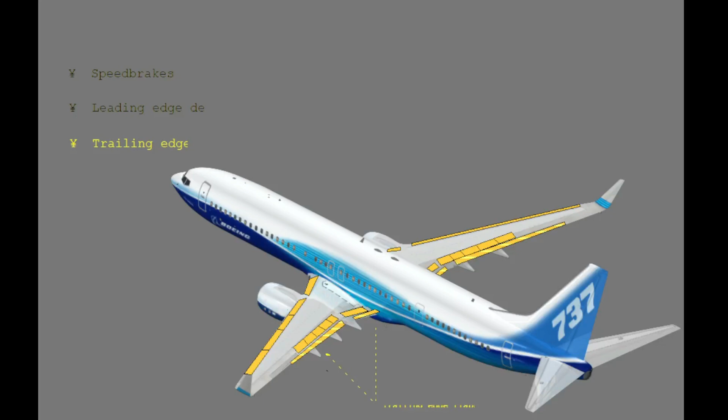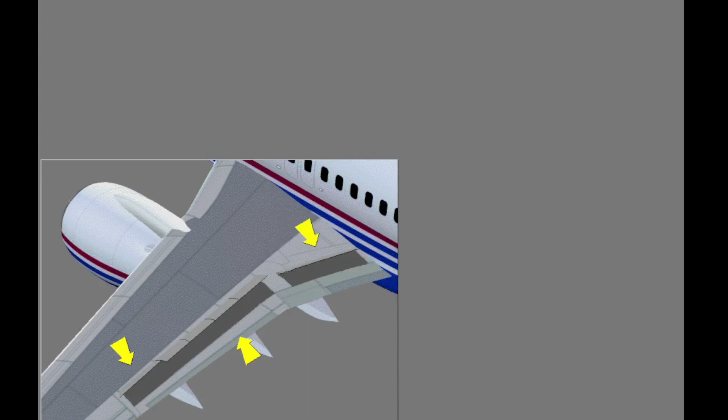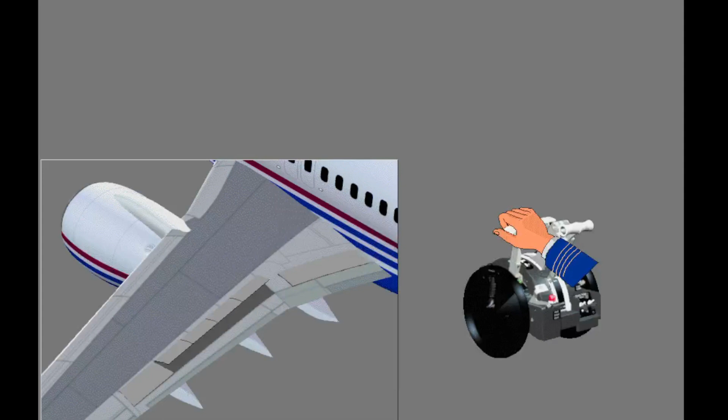Each wing has 4 flight spoilers and 2 ground spoilers. The flight spoilers are operated manually in flight to slow the airplane or increase the rate of descent, or automatically to help the ailerons in roll control.

You must be careful when you operate the flight spoilers manually and the airplane is turned. The airplane roll rate can quickly increase. The ground spoilers operate with the flight spoilers on the ground. The flight spoilers use hydraulic systems A and B. The ground spoilers use hydraulic system A.

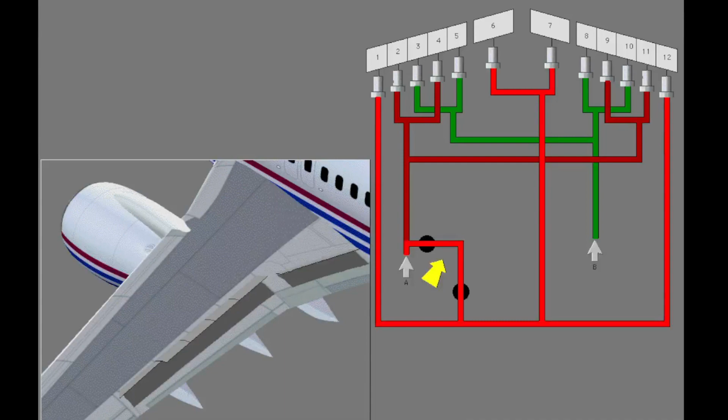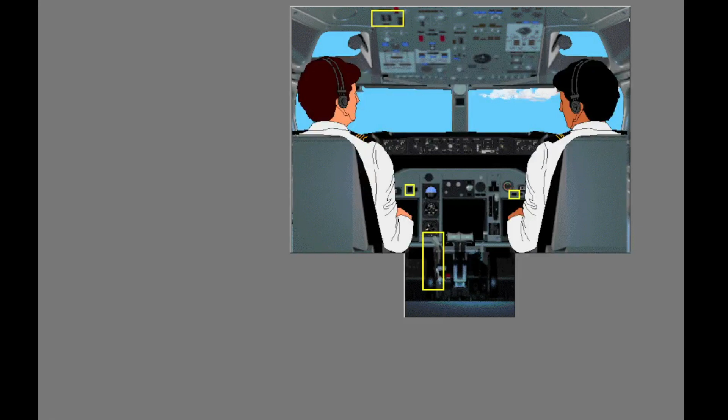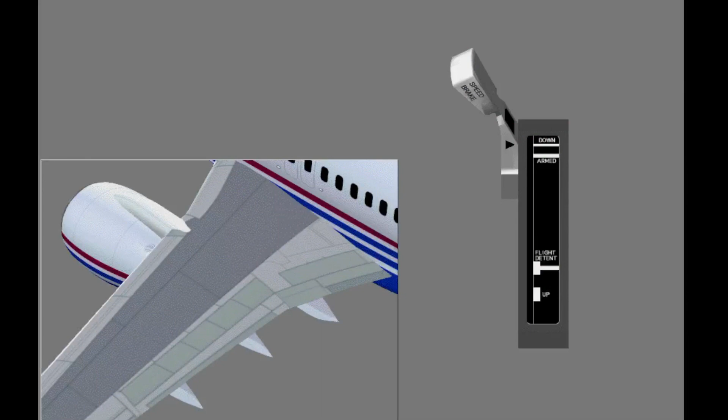The controls and indicators for the spoiler speed brakes are found here. The speed brake lever is on the captain's side of the control stand. In the down detent position, all flight and ground spoiler panels are down. The armed position is for automatic operation.

In the flight detent position, all flight spoilers extend to the maximum position. In the up position, all flight and ground spoilers extend to their maximum position. The up position is used only on the ground.

The speed brake armed light is on the captain's instrument panel and shows that the speed brake system is armed for automatic inputs.

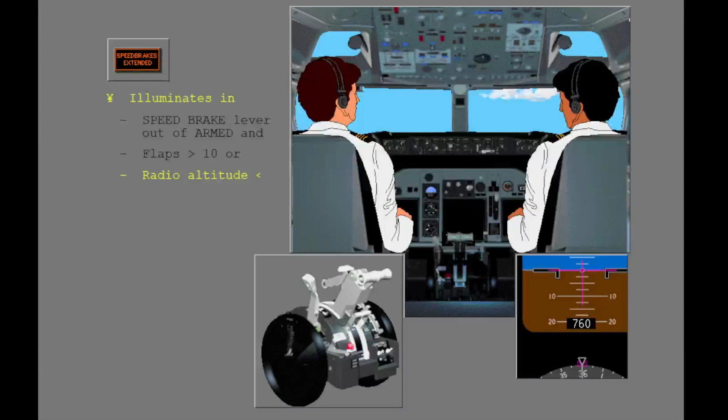The speed brake extended light on the first officer's instrument panel illuminates in flight when the speed brake lever is out of the armed position and the trailing edge flaps are extended to more than flaps 10, or radio altitude is less than 800 feet.

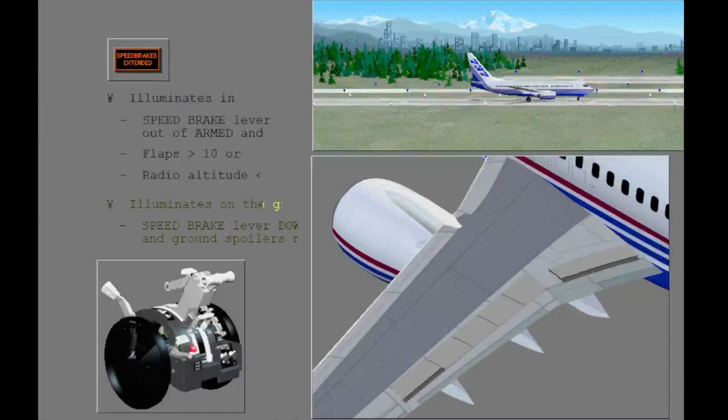The speed brake extended light illuminates on the ground when the speed brake lever is in the down detent position and the ground spoilers are not stowed. The spoilers are set to operate automatically on landing or during a rejected takeoff.

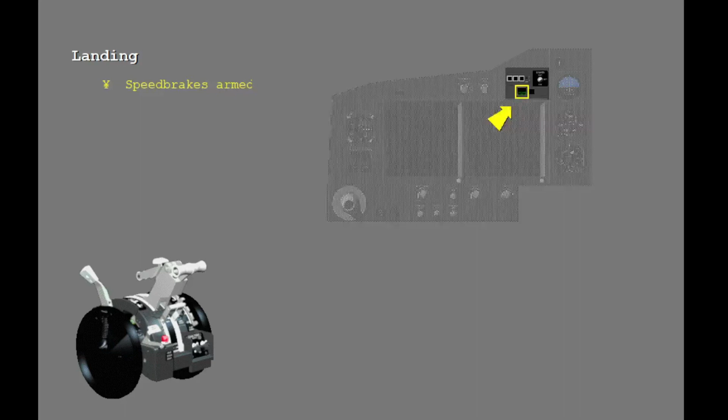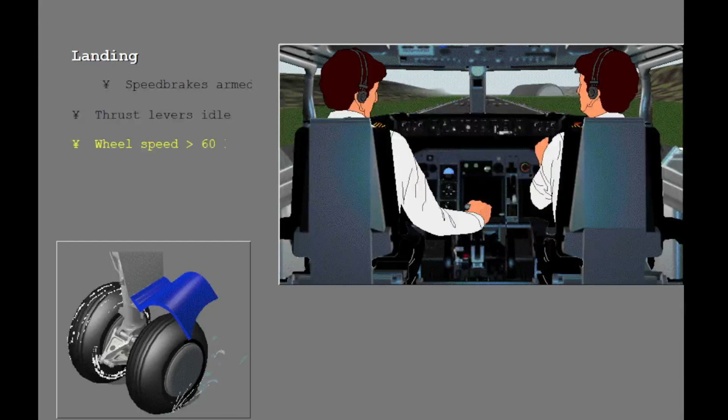To operate automatically on landing, you must have the speed brake lever in the armed position and the speed brake armed light illuminated, the thrust levers in the idle position, a main landing gear wheel speed of more than 60 knots, and a landing gear strut compression.

When the left main, right main, or nose gear strut compresses, the flight spoilers move up. When the right main gear strut compresses, the ground spoilers move up.

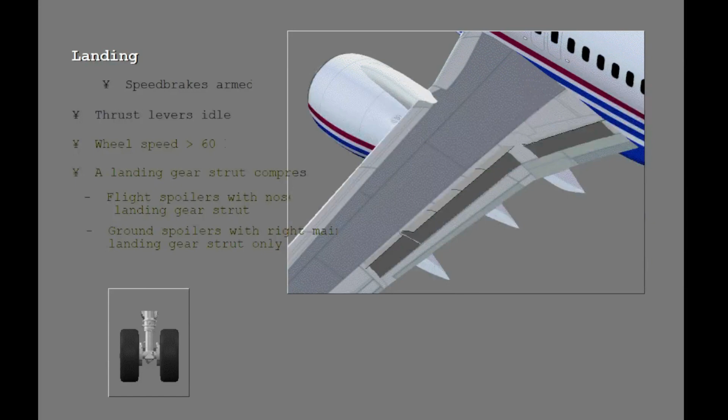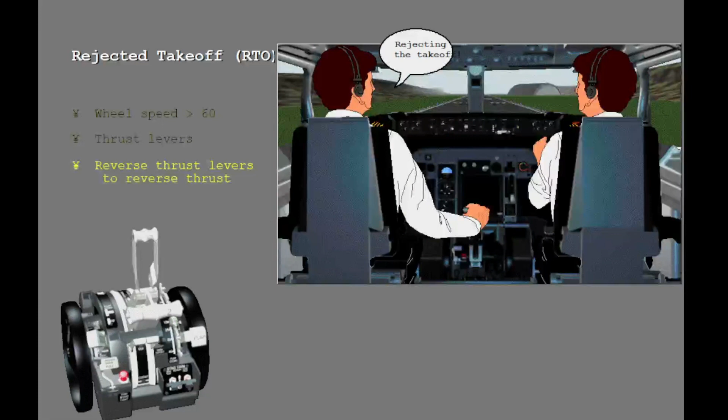During a rejected takeoff, all spoilers operate if the main landing gear wheel speed is more than 60 knots, the thrust levers are in idle, and the reverse thrust levers are moved to reverse thrust. The spoiler switches on the flight control panel are for maintenance use only.

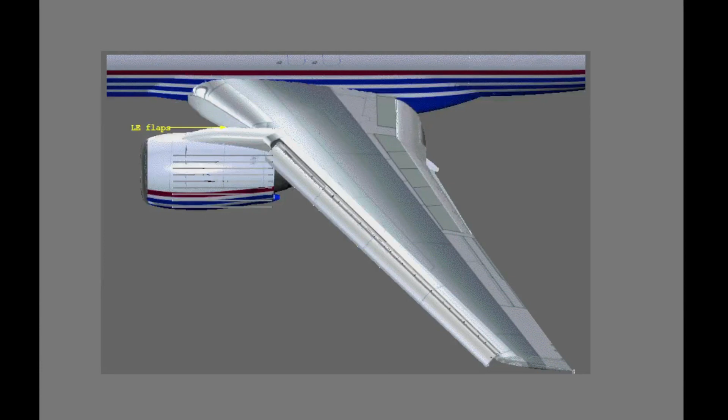The leading edge devices and trailing edge flaps are high lift devices that increase wing lift and decrease stall speed during takeoff, low speed flight, and landing. The leading edge devices are the leading edge flaps, which have two positions, up and full extended, and the leading edge slats, which have three positions, up, extended, and full extended.

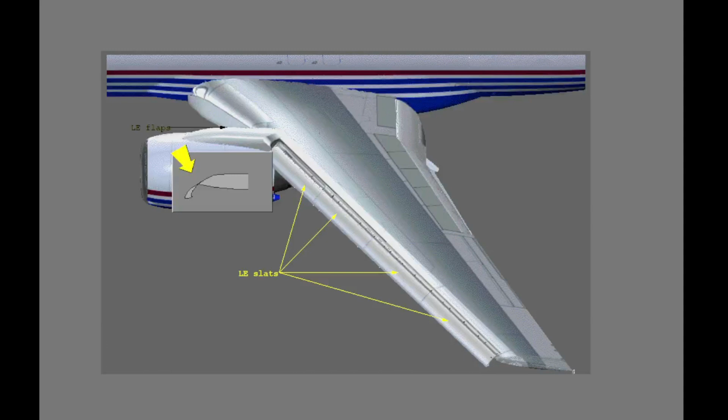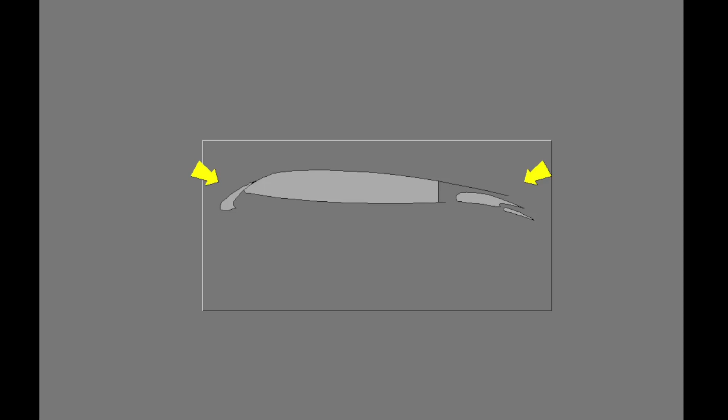The trailing edge flaps are double slotted. Extension of the leading edge devices occurs in sequence with the movement of the trailing edge flaps. The leading edge devices and trailing edge flaps use hydraulic system B. The standby hydraulic system is the alternate source for extension of the leading edge devices.

An electrical motor is the alternate system for extension and retraction of the trailing edge flaps. Alternate flap and slat operation is discussed in a different lesson. The flap lever is on the first officer's side of the control stand.

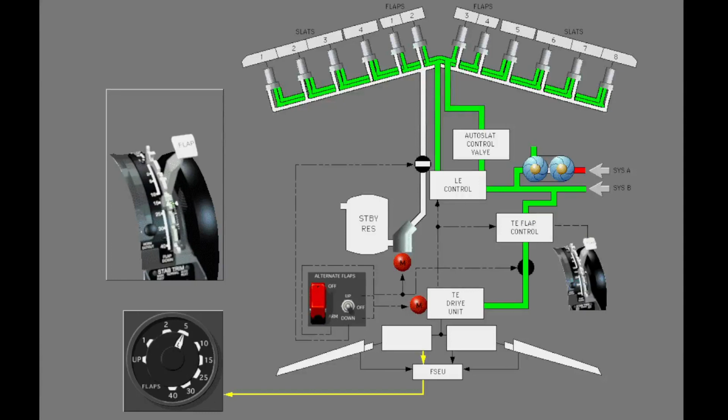When the flap lever moves, the trailing edge flap control and leading edge control operate, and hydraulic pressure goes to the trailing edge drive unit and the leading edge slats. The flap position indicator shows the trailing edge flap positions.

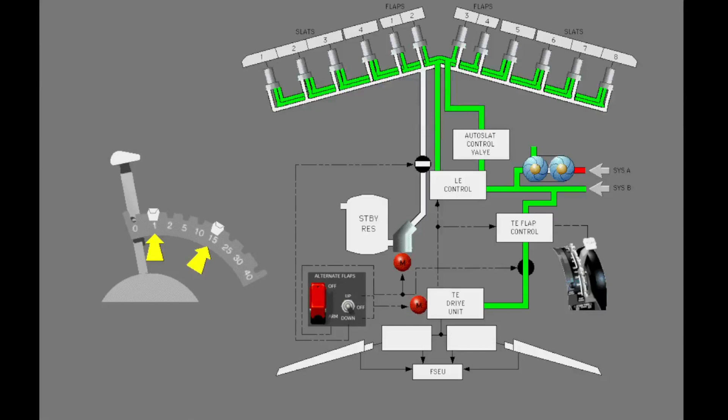Flap gates prevent accidental movement through position 15 during a single engine go-around and position 1 during a normal go-around. The flaps limit placard shows the maximum speed for each flap position.

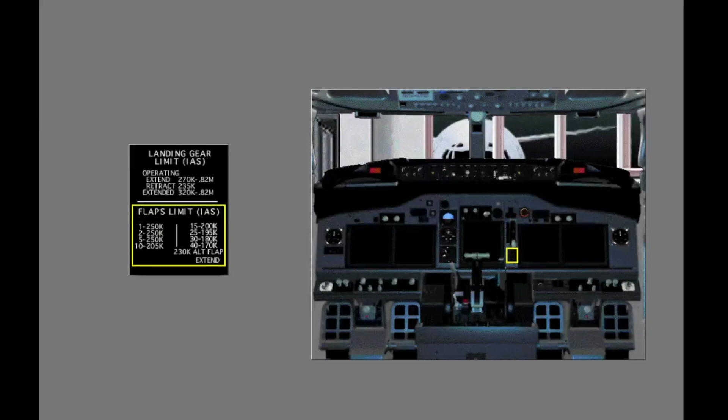The flap slat electronics unit, or FSEU, supplies trailing edge flap load relief from higher than normal airspeed for flaps 40, 30, 25, 15, and 10.

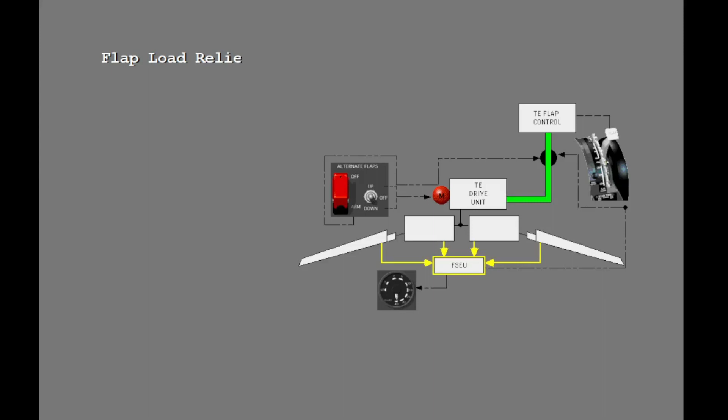The FSEU tells the flaps to retract from 40 to 30 if the airspeed is more than 171 knots. When the flap lever is set to 30, the flaps retract to 25 if the airspeed is more than 181 knots. When the flap lever is set to 25, the flaps retract to 15 if the airspeed is more than 196 knots. At flaps 15, the flaps retract to 10 if the airspeed is more than 201 knots, and at flaps 10, the flaps will retract to 5 if the airspeed is more than 206 knots.

The flap lever does not move, but the flap position indicator shows the retracted position. The flaps extend back to the set position when the airspeed decreases below 166 knots for flaps 40, below 176 knots for flaps 30, below 191 knots for flaps 25, below 196 knots for flaps 15, and below 201 knots for flaps 10.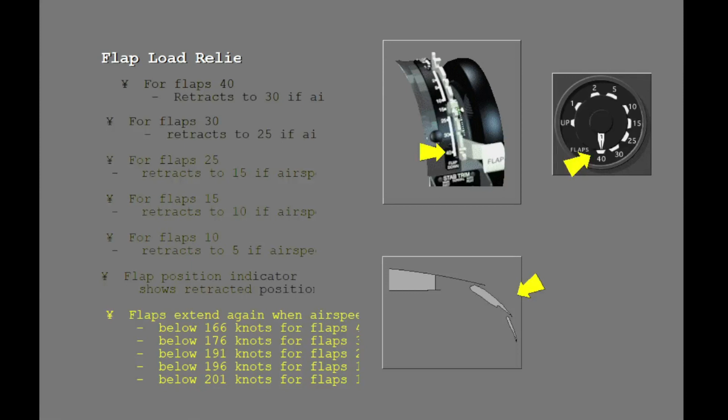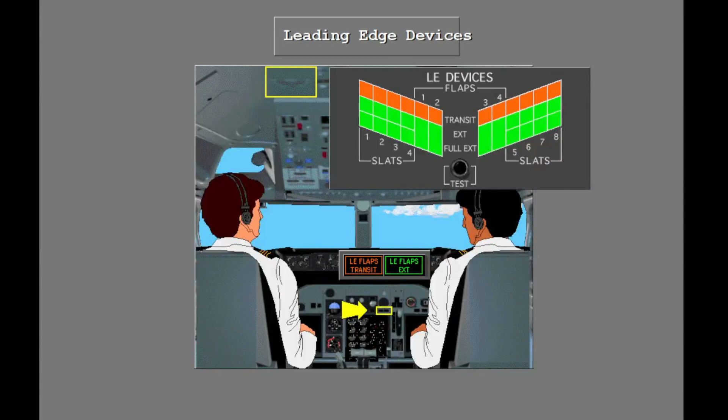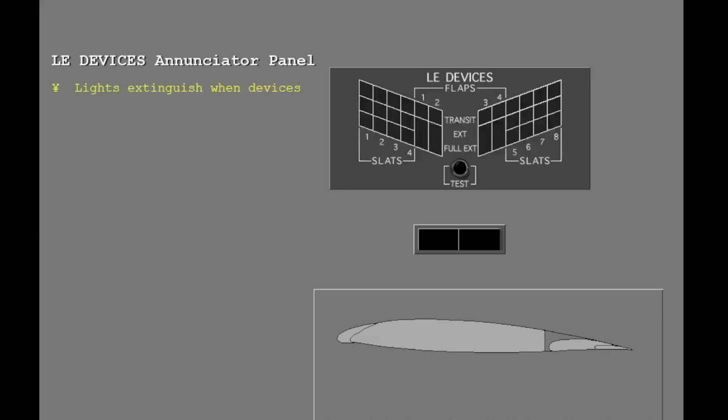Indications for the leading edge devices are on the center instrument panel and the aft overhead panel. The leading edge devices annunciator panel shows the position of each leading edge flap and slat. The leading edge flap transit and extended lights show the condition of the leading edge devices. When all the lights extinguish, the devices are retracted. The amber leading edge devices transit lights and leading edge flaps transit light illuminate when the leading edge devices are in transit or not in the correct position.

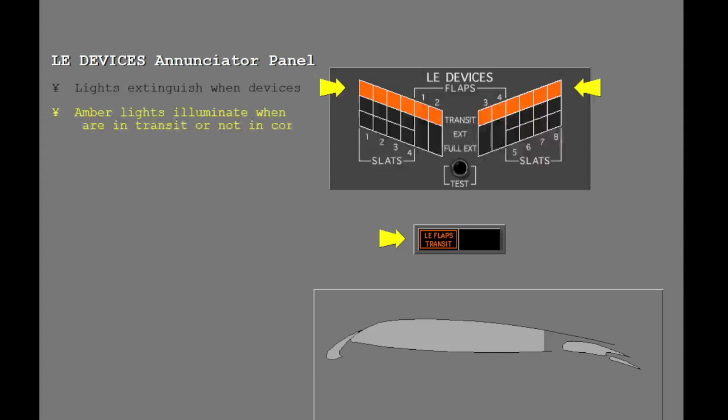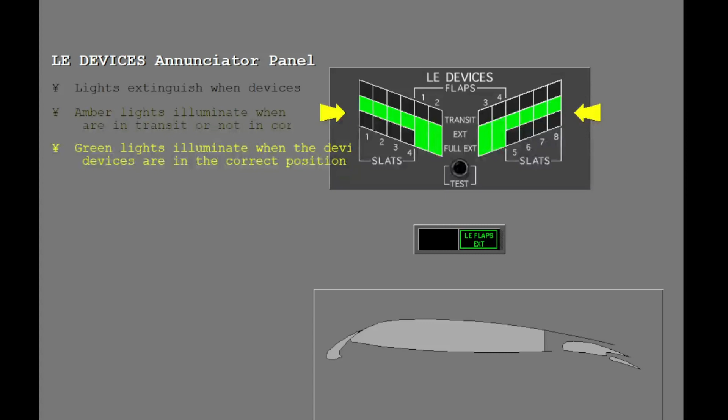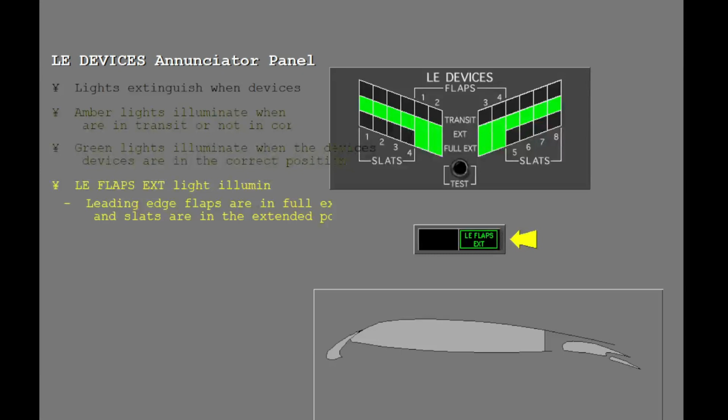The green leading edge devices extended or full extended lights illuminate when the leading edge devices are in the correct position. The leading edge flaps extended light illuminates when the leading edge flaps are in the full extended position and the slats are in the extended position, or the leading edge flaps and slats are in the full extended position. Push and hold the test switch. The test switch illuminates all annunciator panel lights.

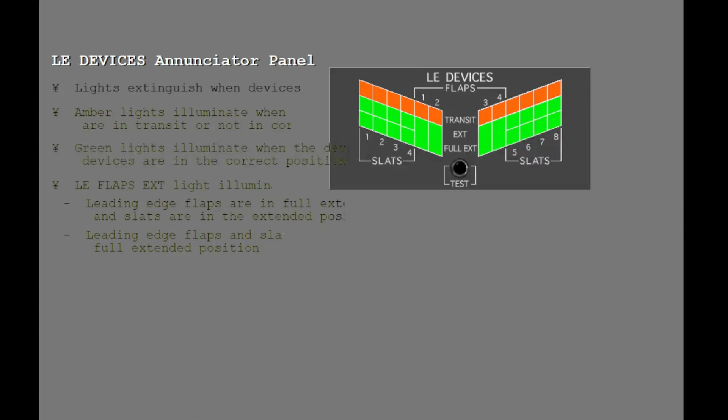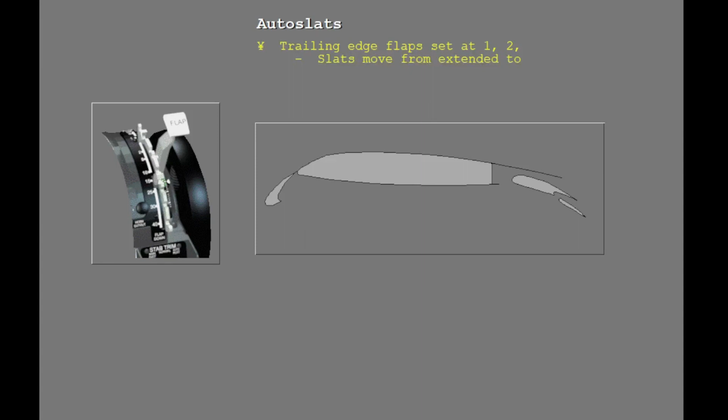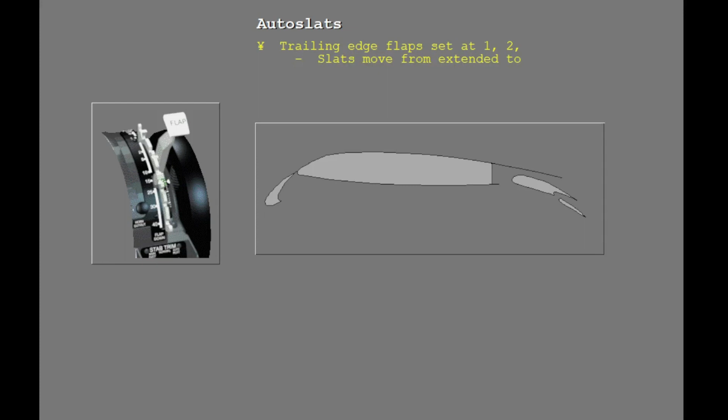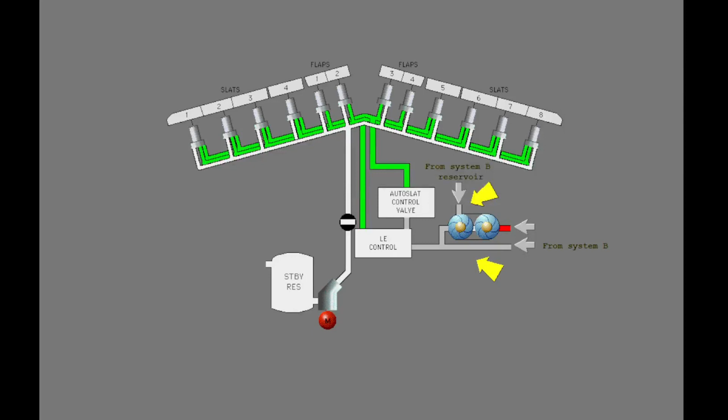The auto slat system increases wing lift if the airplane approaches a stall during takeoff or approach to landing. With the trailing edge flaps set at 1, 2, 5, 15, or 25, the auto slat system moves the leading edge slats from extended to the full extended position before stick shaker. The slats move back to the extended position when the pitch angle is below the stall attitude. The auto slat system uses hydraulic system B. If pressure from the hydraulic system B engine-driven pump is not sufficient, the power transfer unit, or PTU, uses hydraulic system A to pressurize system B for auto slat operation.

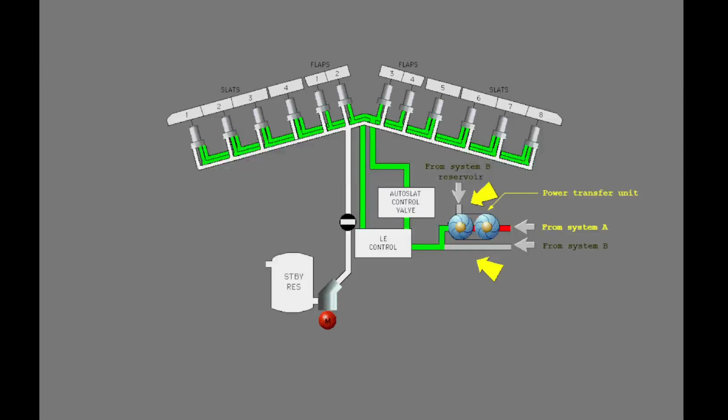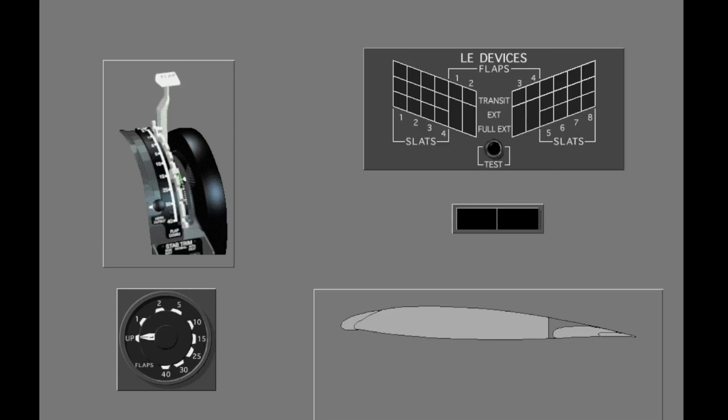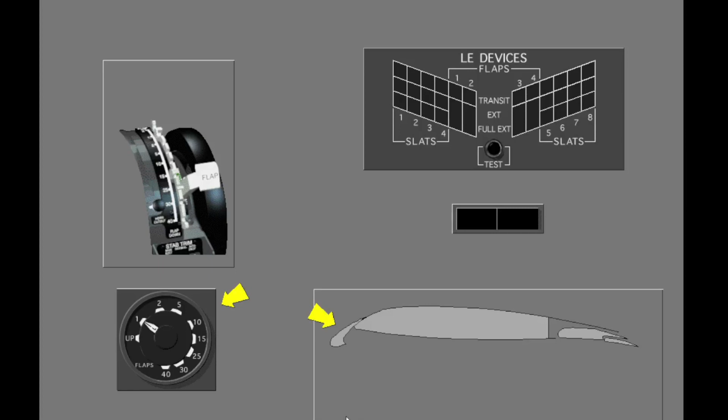Let's look at a flap extension sequence. Set flaps 25. When the flap lever is set to a position anywhere from 1 to 25, the trailing edge flaps move from the up position and the leading edge devices move to the extend position. The leading edge flaps transit light and leading edge devices transit lights illuminate. When the trailing edge flaps near the 1 position, the leading edge flaps are at full extended. The slats are at extended, and the leading edge flaps extended light illuminates.

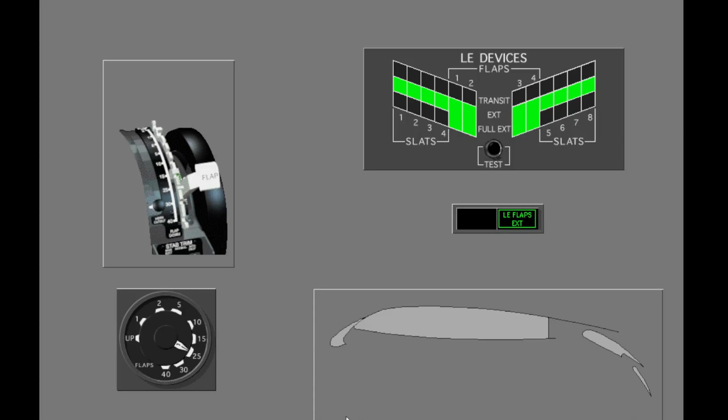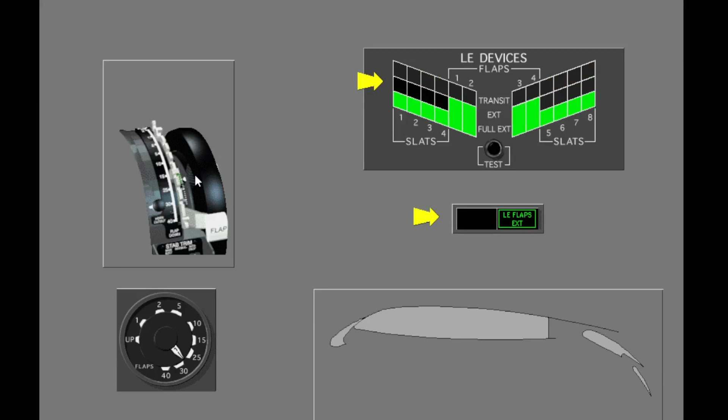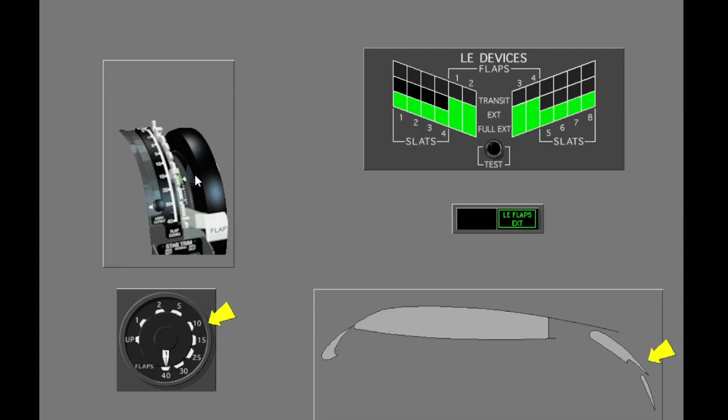Set flaps 40. When the trailing edge flaps move past flaps 25, the slats move to the full extend position. The lights again show in transit and then full extended. Only the trailing edge flaps continue to extend from flaps 30 to flaps 40.

Let's look at the non-normal conditions related to secondary flight controls. The speed brake Do Not Arm light is on the captain's instrument panel and shows the automatic speed brake system is inoperative. During the landing roll, you must manually move the speed brake lever to up. The auto slat fail light illuminates when the auto slat system is not available. The flight controls system annunciator and master caution lights illuminate. Reset the master caution system.

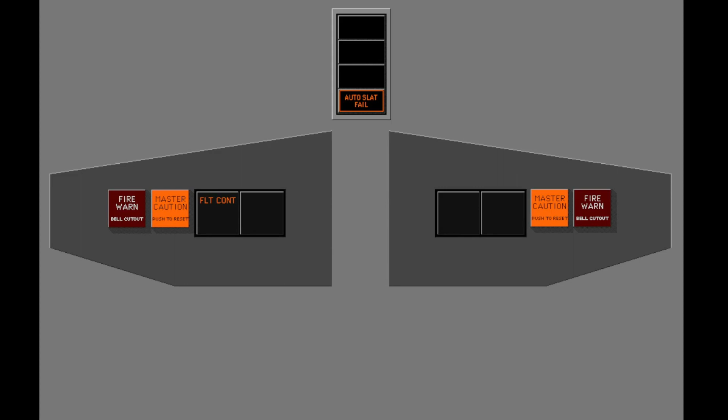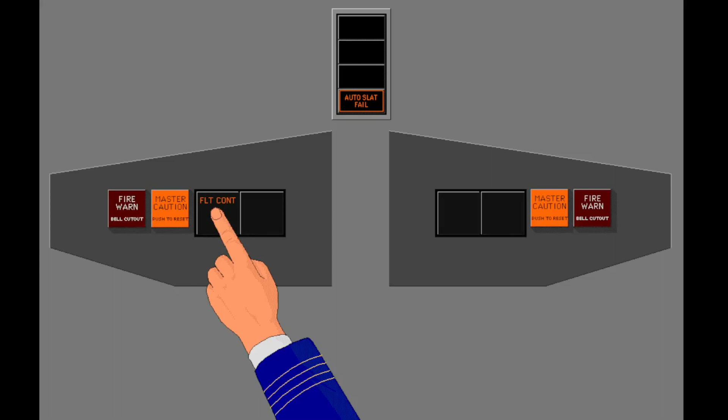A failure of a single SMYD channel illuminates the auto slat fail light, flight controls system annunciator, and master caution lights when the master caution system recall is activated. No crew action is required for an auto slat system failure.

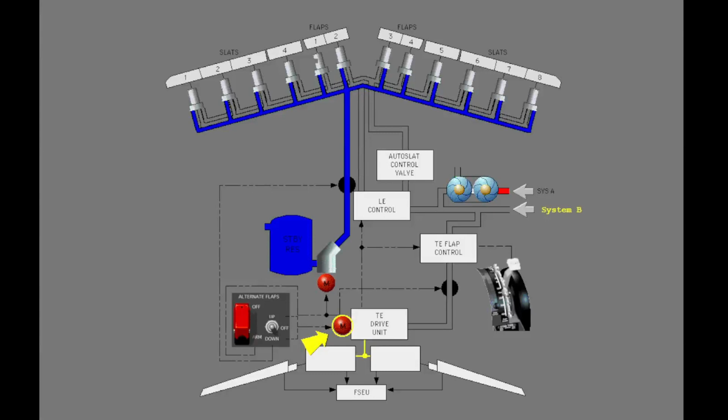If hydraulic system B does not operate, the standby hydraulic system is the alternate source for extension of the leading edge devices, while an electrical motor is the alternate system for extension and retraction of the trailing edge flaps. The alternate flaps master switch and position switch control the alternate flap system.

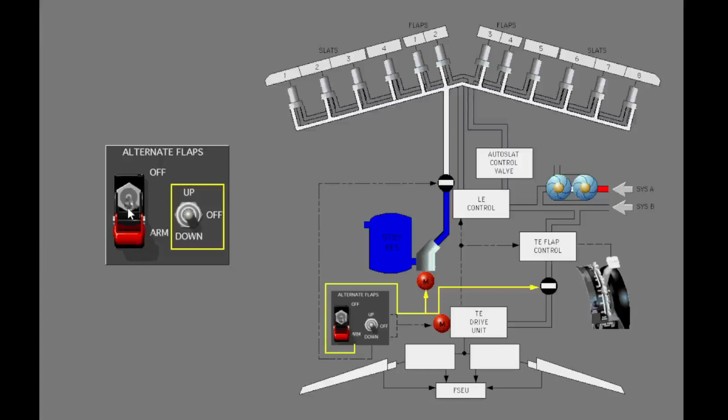Open the guard and move the master switch to arm. When the alternate flap master switch is in the arm position, the alternate flaps position switch is armed. The standby hydraulic pump turns on, and the trailing edge flap bypass valve closes. Next, move the alternate flaps position switch to down.

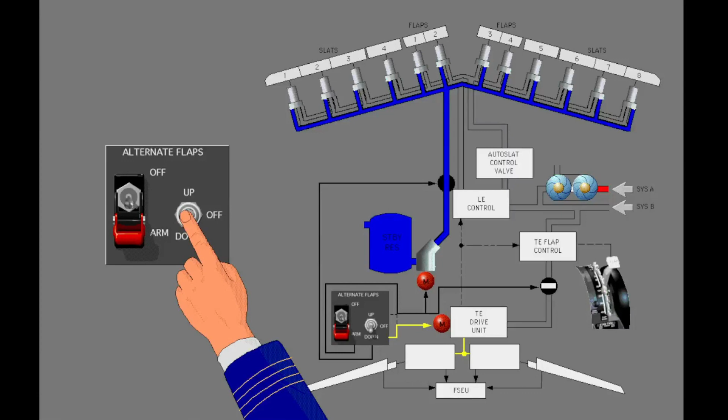In the down position, the standby hydraulic system moves the leading edge flaps and slats directly to the full extended position, while an electric motor extends the trailing edge flaps. The down position is spring-loaded and must be held until the flaps reach the correct position. Trailing edge flap extension is slow and can be as long as 2 minutes for the flaps to move from up to flaps 15.

Under normal flap operation, if the leading edge slats are in the full extended position with the trailing edge flaps set at 25 or less, the FSEU senses the incorrect configuration and the amber leading edge flaps transit light is illuminated.

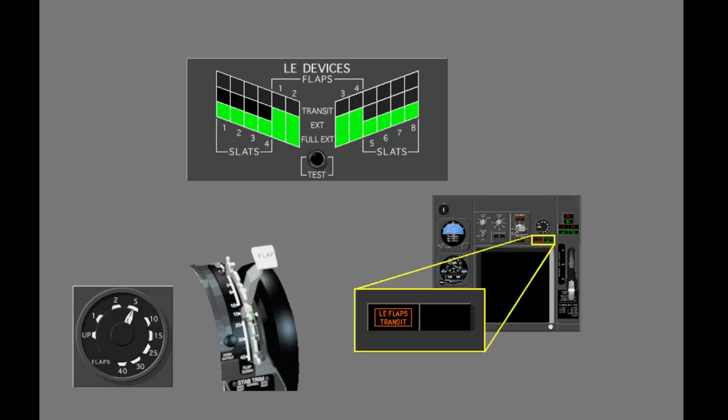When alternate flaps operation is required, flaps 15 is typically the final flap setting. Because of this, during alternate flaps operation, the amber leading edge flaps transit light will extinguish at flaps 15 to remove the potential distraction, and the green leading edge flaps extended light will illuminate.

To retract the trailing edge flaps, move the alternate flaps position switch to up. The up position is magnetically held. Leading edge flaps and slats stay fully extended and cannot be retracted by the standby hydraulic system. The additional drag can cause your reserve fuel to not be sufficient to fly to an alternate airport.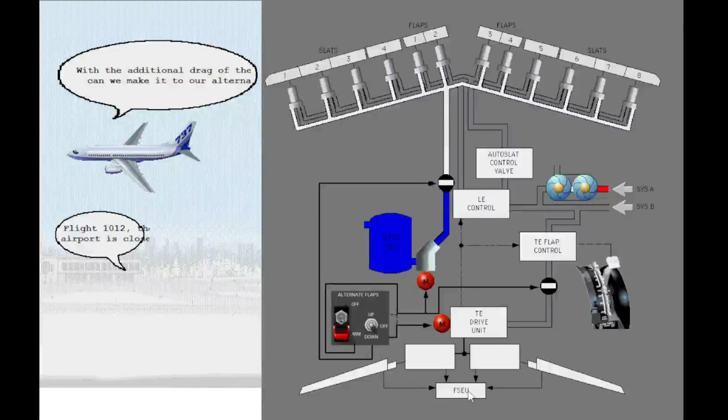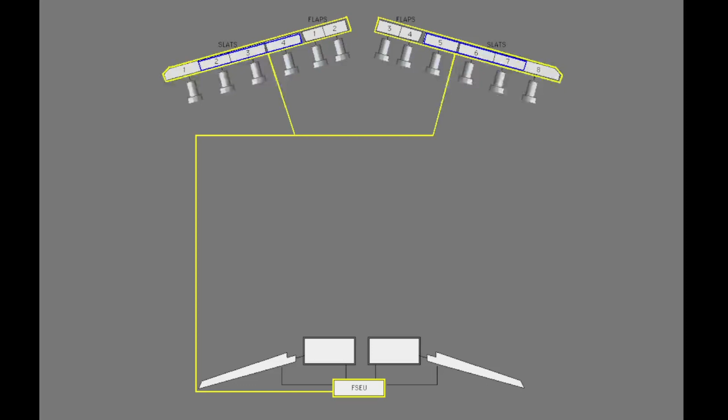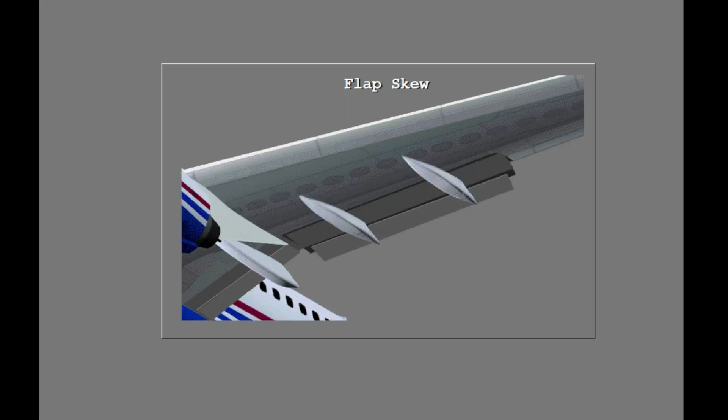The FSEU monitors the trailing edge flaps for asymmetry and skew conditions, the leading edge devices for an incorrect position, and the leading edge slats 2 through 7 for a skew condition. A flap asymmetry occurs when a flap on one wing is not aligned with the same flap on the other wing. A skew condition occurs when the two drives for a flap or slat panel do not operate at the same rate and cause the panel to twist during extension or retraction.

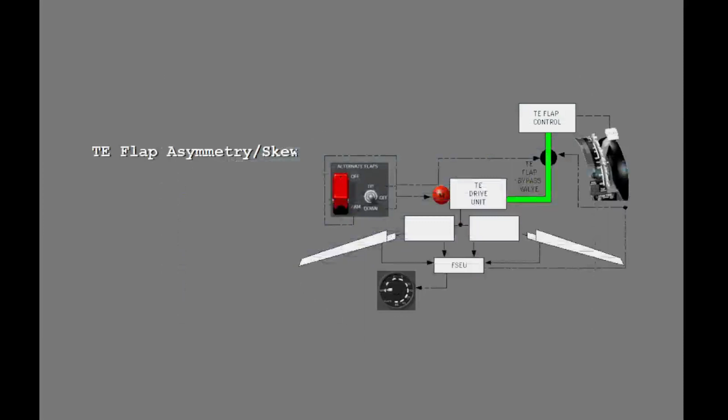When the FSEU senses a trailing edge asymmetry or skew condition, the FSEU closes the trailing edge bypass valve and you see a needle split on the flap position indicator. If an asymmetrical trailing edge flaps condition exists, do not attempt to move the trailing edge flaps with the alternate flaps position switch. There is no asymmetry or skew protection when the alternate flap extension system is used.

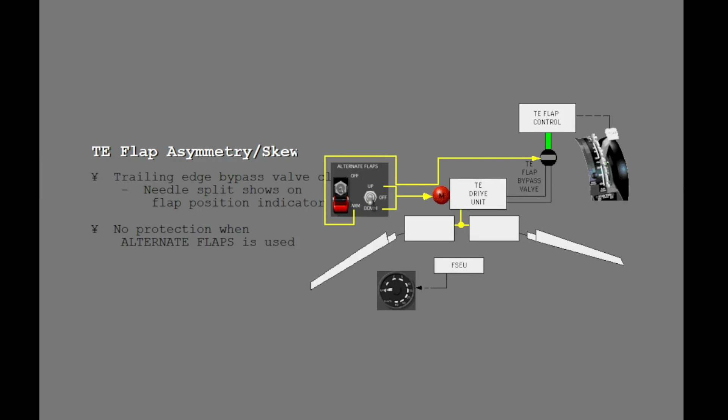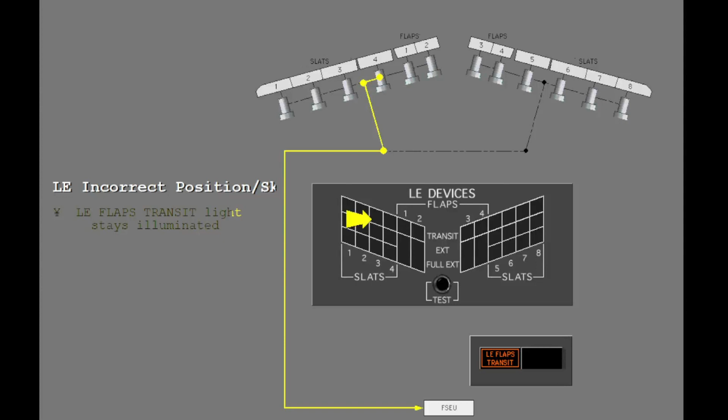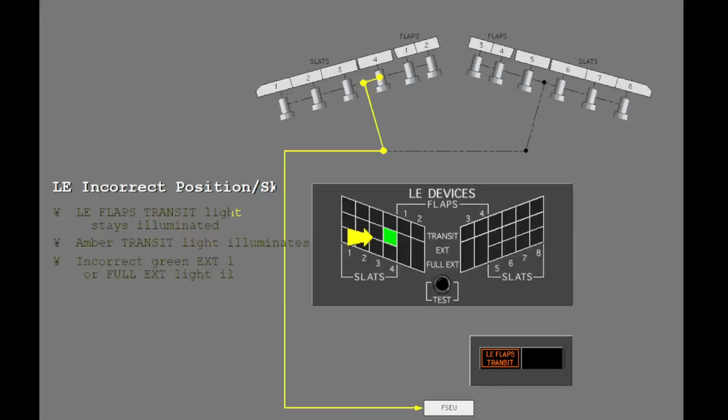When the FSEU senses a leading edge flap or slat not in the correct position, or a leading edge slat skew condition, the leading edge flaps transit light stays illuminated. And one of these indications is shown on the leading edge devices annunciator panel: an amber transit light illuminates, an incorrect green extended or full extended light illuminates, or no lights illuminate.

There is no skew detection for the leading edge flaps or slats 1 and 8, and a slat skew is not monitored during autoslat operation.

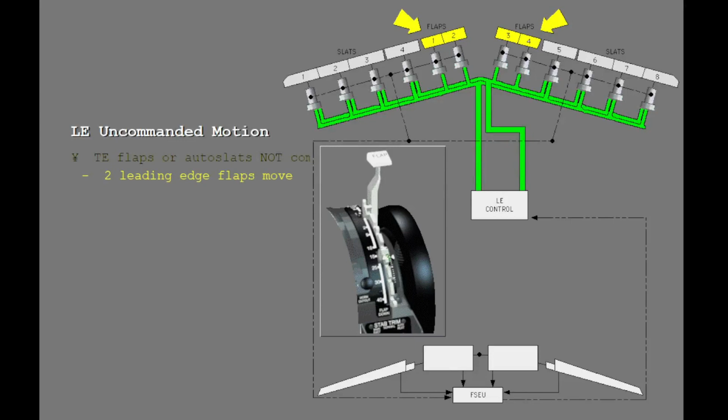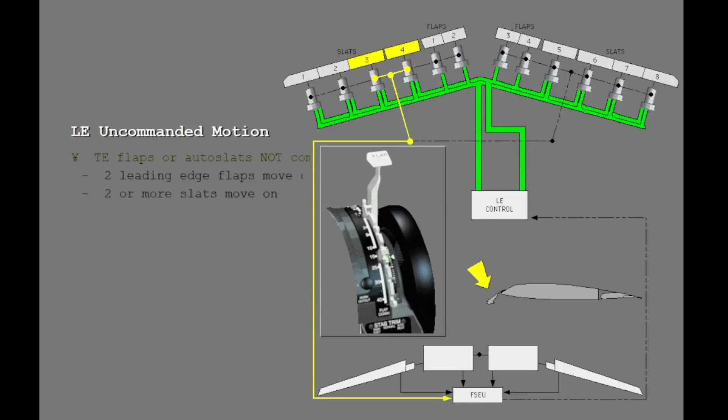The FSEU also monitors uncommanded motion of the leading edge devices or trailing edge flaps. Uncommanded motion for a leading edge device occurs when the trailing edge flaps or autoslats are not commanded, and two leading edge flaps move on one wing, or two or more slats move on one wing. In this example, the flaps are up and two slats moved. The amber leading edge flaps transit light illuminates, the FSEU stops the operation of the leading edge control, and the leading edge device is held where it is.

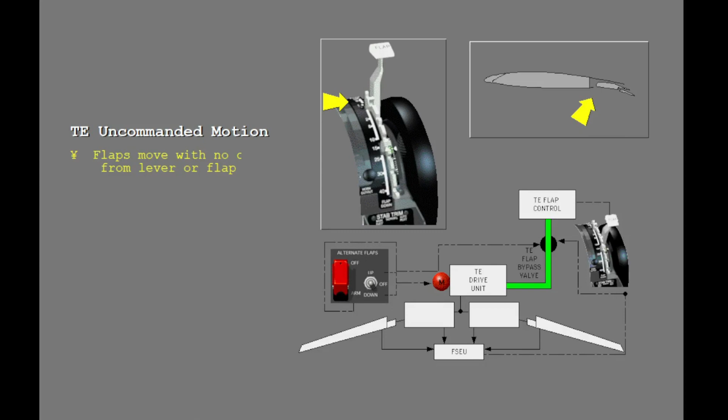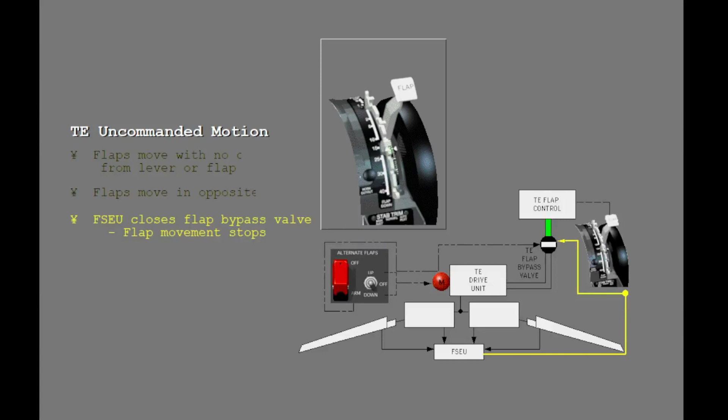The FSEU monitors the trailing edge flap position and compares it to the commanded flap position. If the flaps move when there is no flap lever command or flap load relief command, or they move in the opposite direction of the flap lever, the FSEU closes the flap bypass valve and the flap movement stops. The only indication is the flap indicator and the flap lever position do not agree. In this example, the flap lever position is at 5 and the indicator shows between 1 and 2.

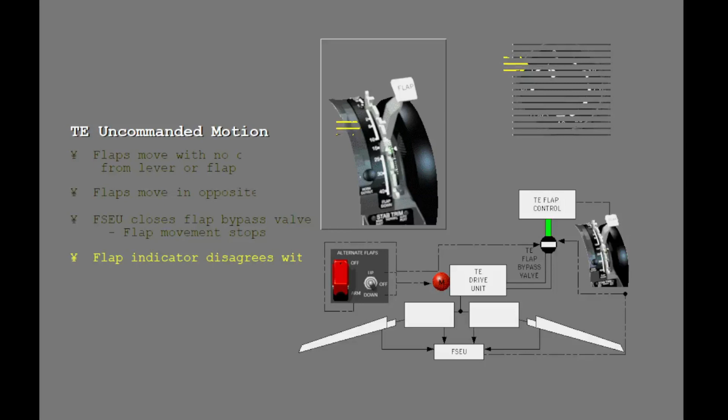Alternate flaps is used to control the trailing edge flaps because the flap bypass valve cannot be reset by the flight crew. Remember, there is no asymmetry or skew protection when the alternate flap extension system is used.